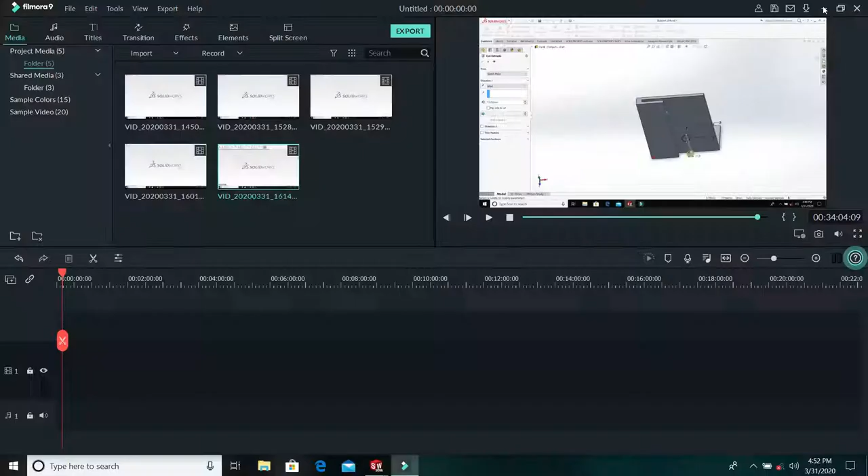Welcome back. So what we'll be doing now is assembling the whole unit, the whole burner unit. We're assembling the knob, the shaft, the support, the rack, the pinion, and the slot with the carriage mechanisms.

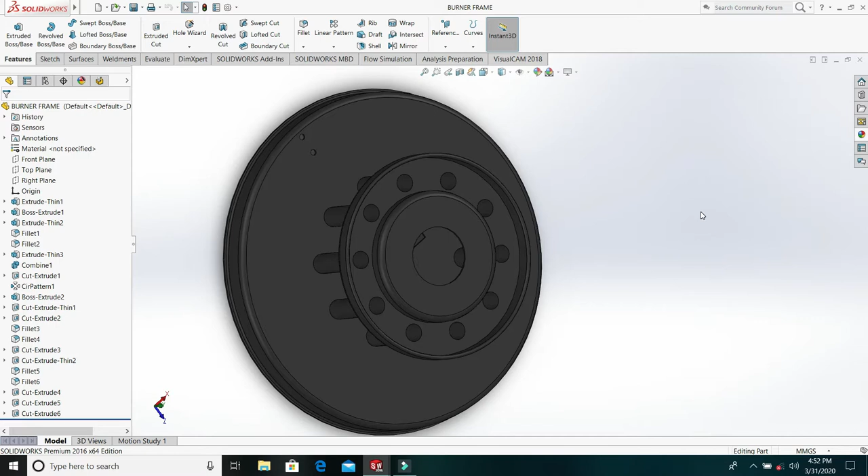So go to your Solidworks and open Ctrl New, and this time you click assembly. Say OK.

So the moment you get to assembly, one of the critical things you have to ask yourself is what's the first critical thing, which is the frame. The frame is the first thing you'll be adding in this particular assembly. So click on the frame and bring it to the screen. Now you can see the frame.

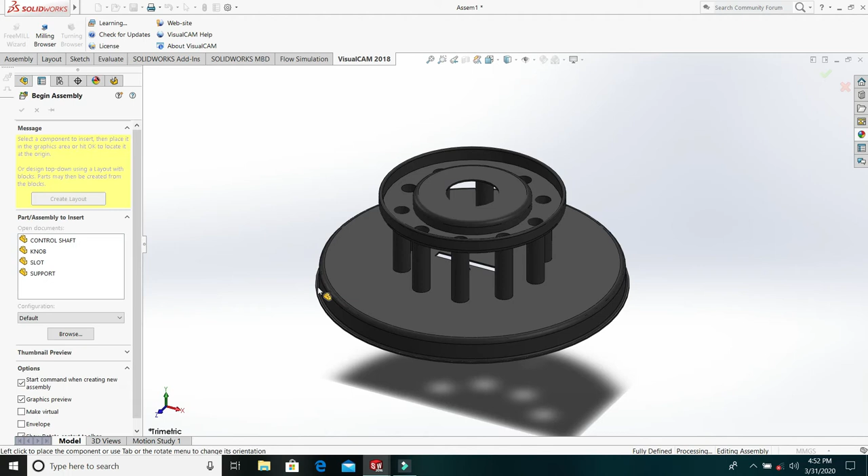Solidworks immediately aligns it to the center and locks it. But what you want to do is right click on it and say make it float.

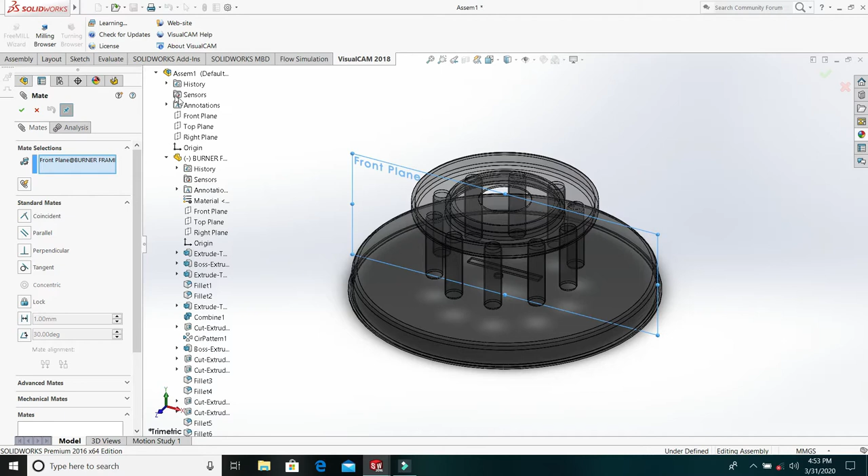So the moment you float it, the front plane of the burner should be mated to the front plane of the assembly. Then the top plane of the burner should be mated to the top plane of the assembly. Once done, the right plane of the burner should be mated to the right plane of the assembly.

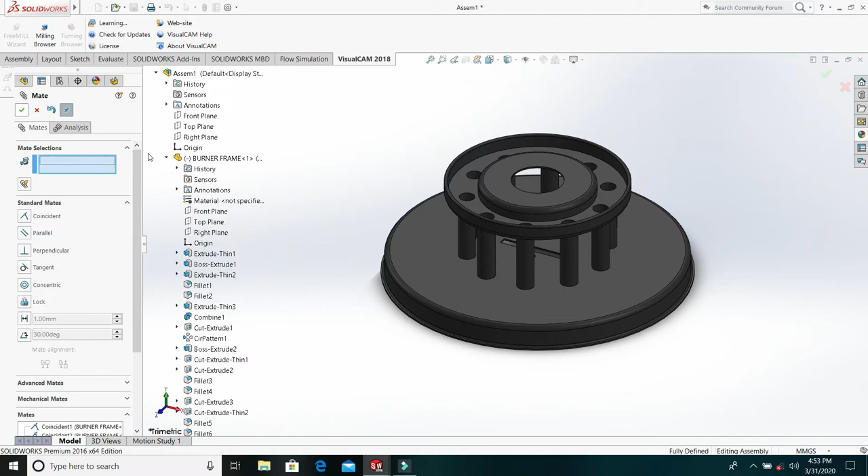If you are done with these three fundamental mates, come back and right click to say make fixed. That stands as your reference point of the first component, and it's fixed there.

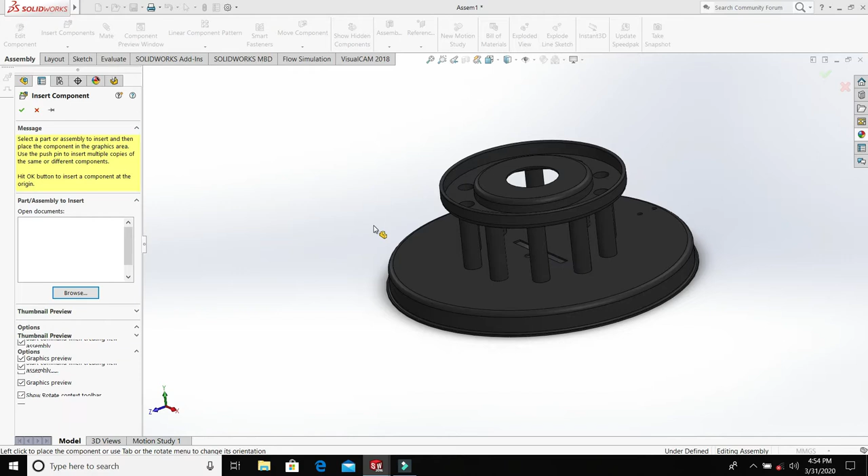So the next thing is to go to assembly and say insert component. What's the next component to put into this system now? For me, I'll put in my carriage assembly. So I'm browsing for the carriage mechanisms. That's the carriage mechanisms coming in.

So the first thing you want to do is create concentric mates between the two circular objects - that's the first edge and the second circular object.

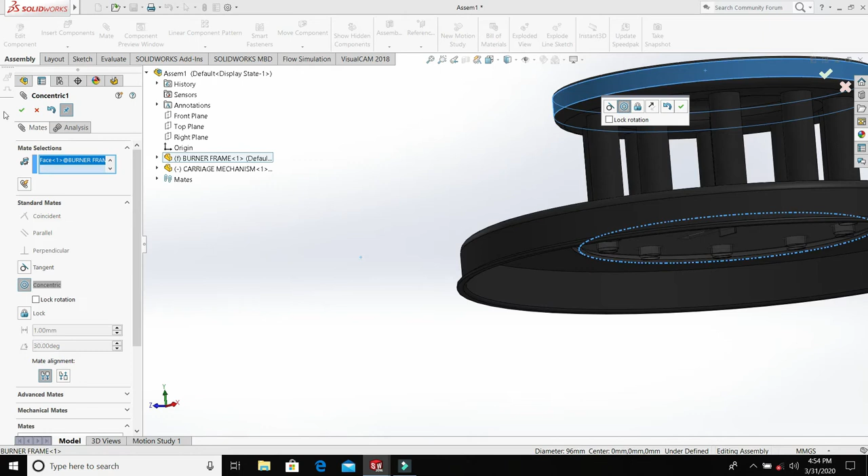Now, one critical thing you need to do here is make one of these holes concentric as well.

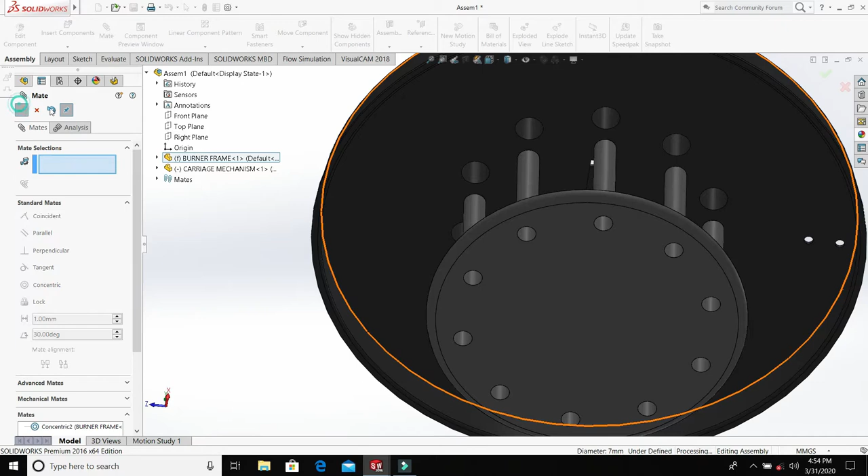If you look at this particular one, it has a limit between minimum and maximum. The distance between here and here has a minimum value and a maximum, and the maximum keeps going up.

To do this in Solidworks, you go to mate, then advanced mate. There's an advanced mate called linear coupler. Go to linear coupler, and within it go to limit.

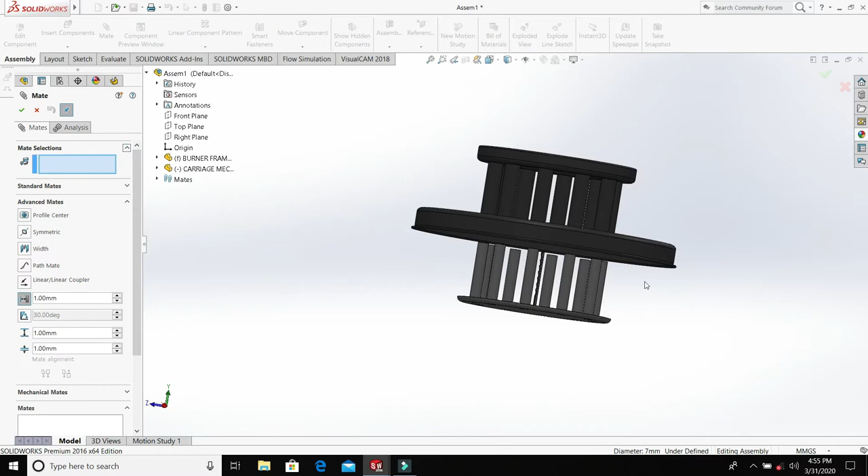At limit, you can define the maximum and minimum point between any two surfaces you select - that's between that surface and that surface. Now I want the maximum distance to be 30, and the minimum to be 2.

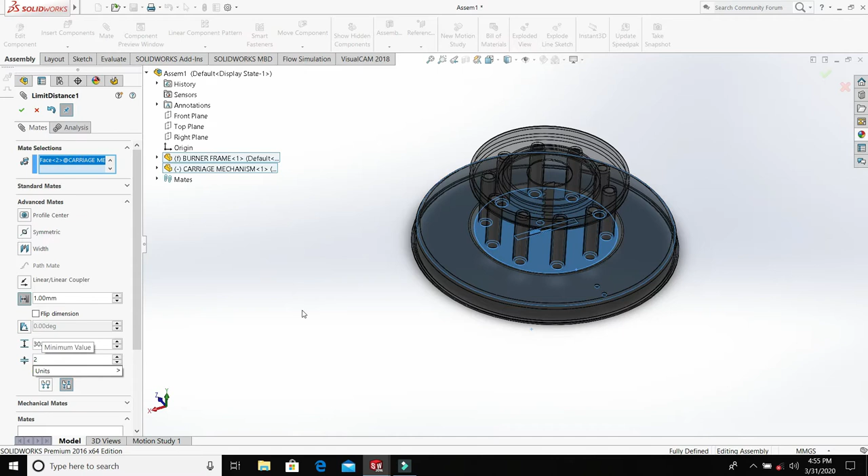So you can see from that screen, I can drag it up and down, the way it behaves in real life.

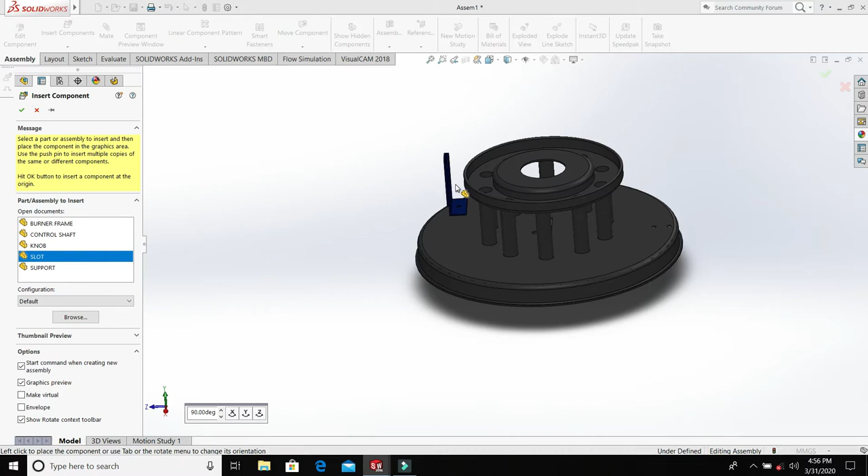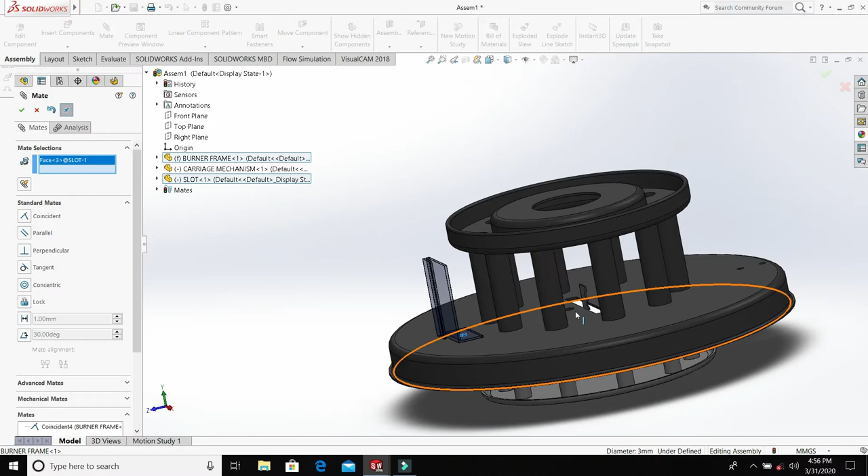Alright, the next thing to put in now, let me insert my slot. So the surface of the slot must be mated with this surface like that, and this hole where you add the bolt to hold it also must be concentric to this one. And turn it back.

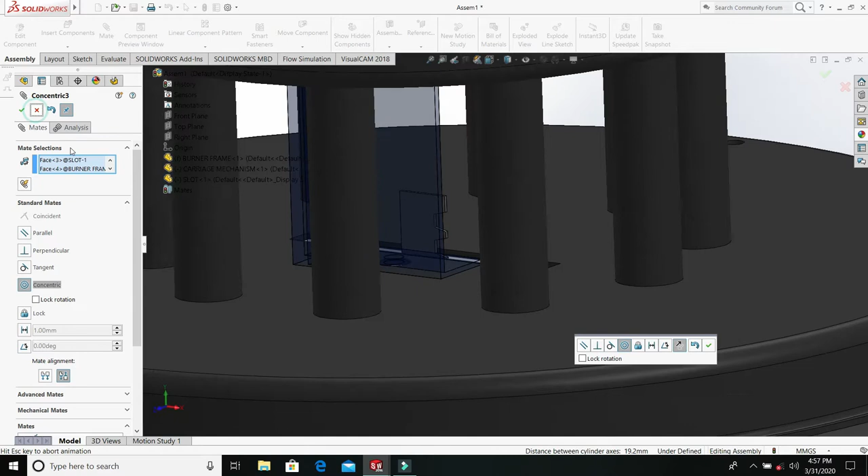Alright, so this face now - let's repeat the concentric mates again. This must be mated with this, concentric, yes. Then this surface must be mated with this surface, this one.

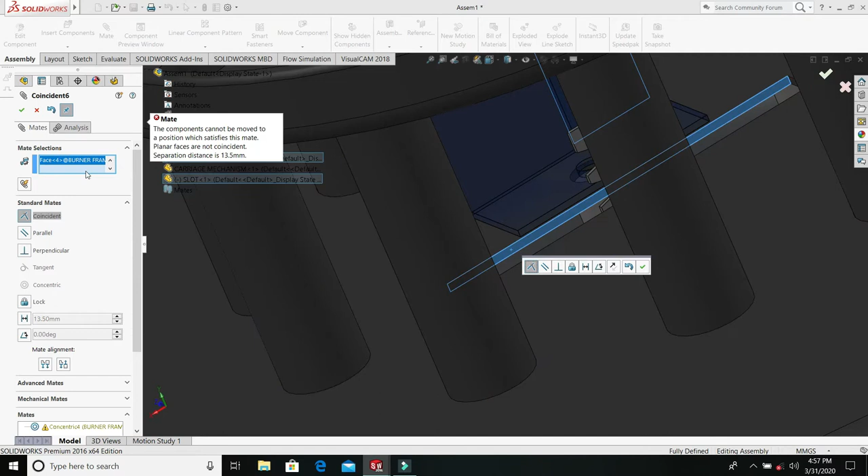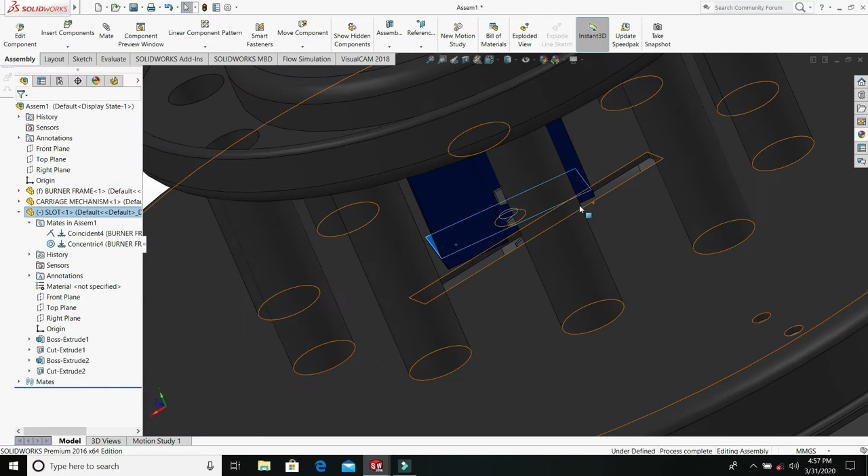So let's look at this guy, this slot - how many mates are in this slot now? This face must be mated with this face.

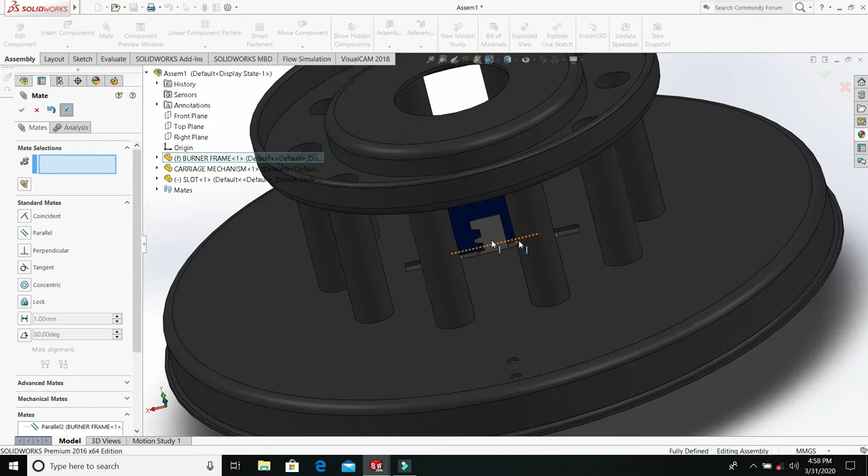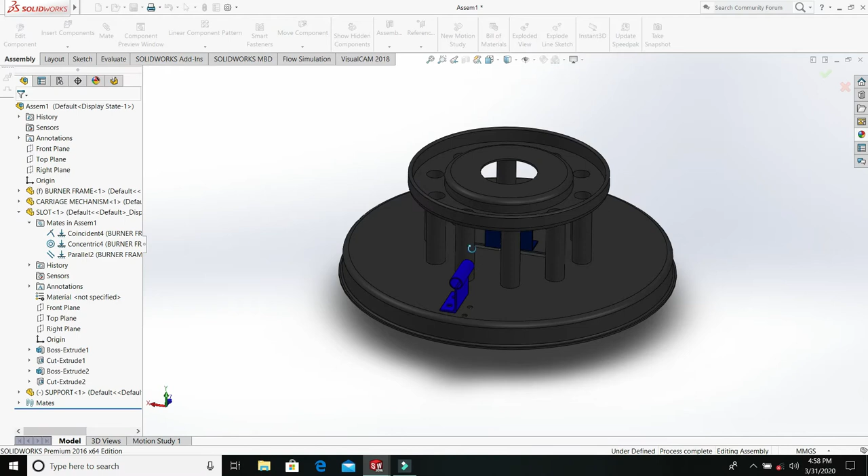Then I should bring the support, this particular support, to the same assembly. So this face of the support should rest on this face.

And this hole should be concentric with this hole. Likewise, the second one should do the same thing.

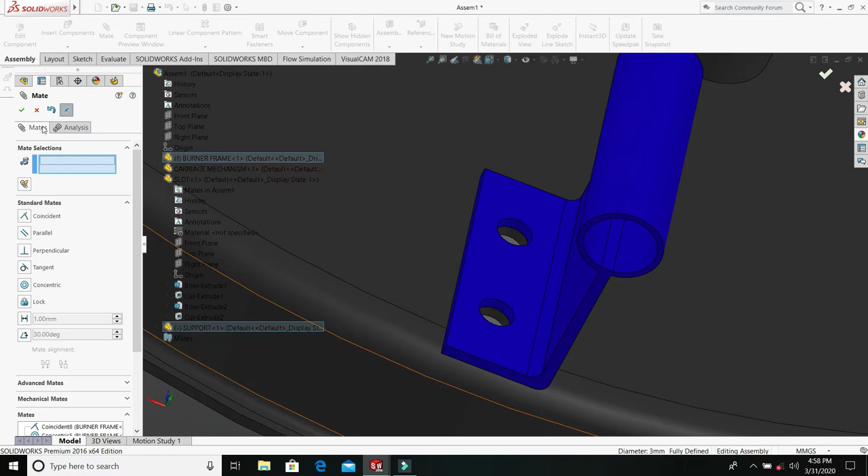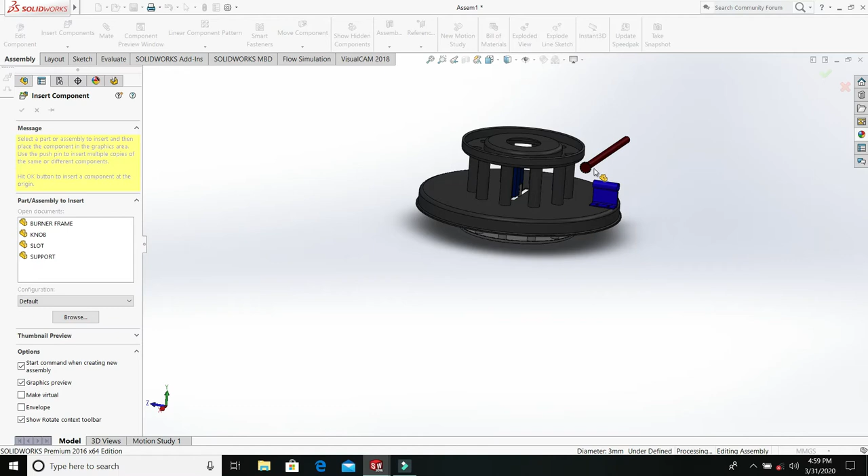Alright, the next thing for me to put in now is the shaft. I need to put in this shaft now. So insert component - control shaft. The control shaft passes through this circle, so there's a concentric mate between this and this. Concentric mate, but in the other direction, down.

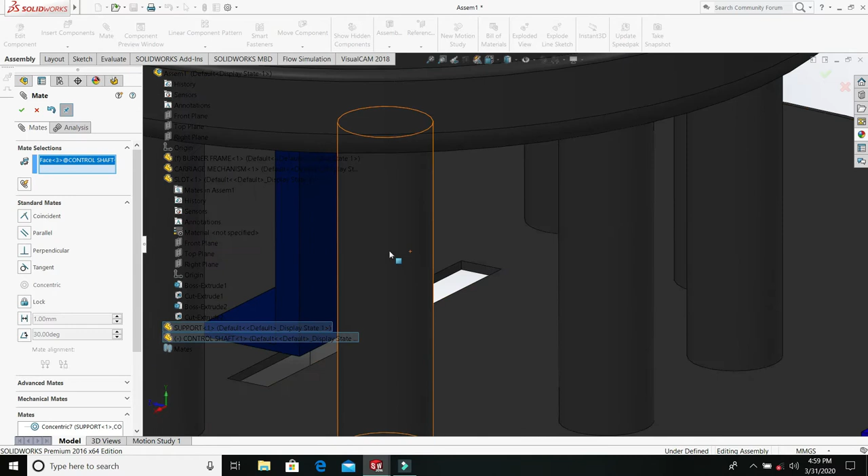So the head of this guy must be coincident with the head of this one, so that they can drive each other. Alright, then the next thing to bring in is the controller.

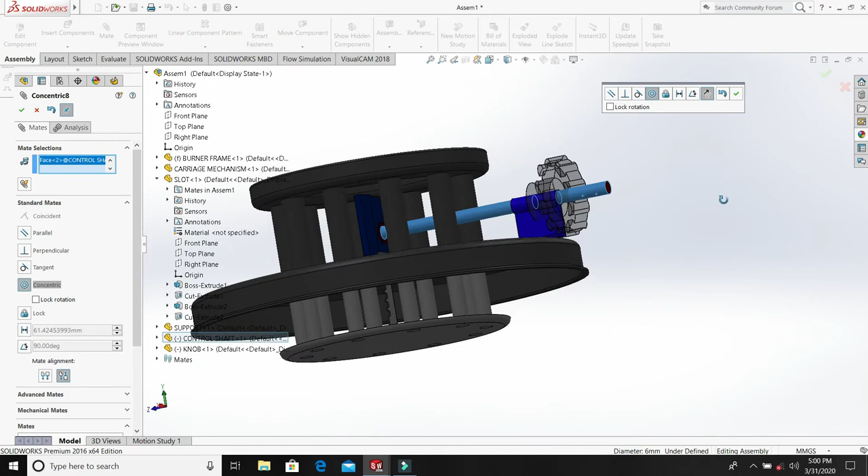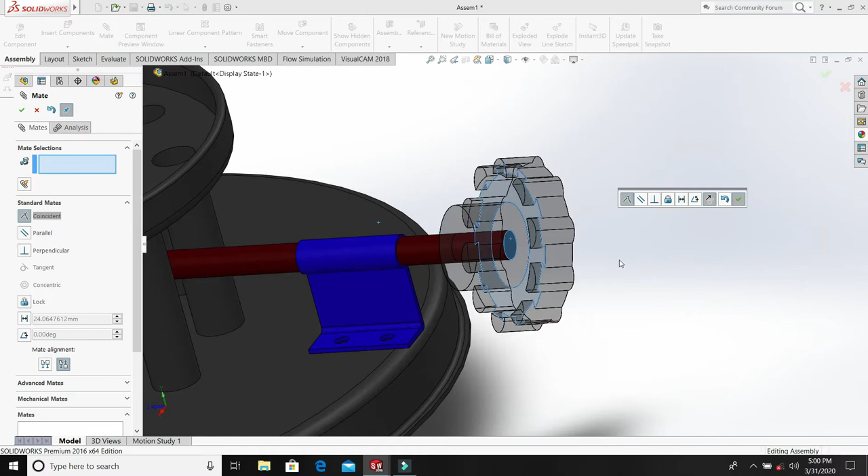In such a way that if I rotate this, you can see kind of movement between them. Observe, if I rotate this, it's coming down and coming up.

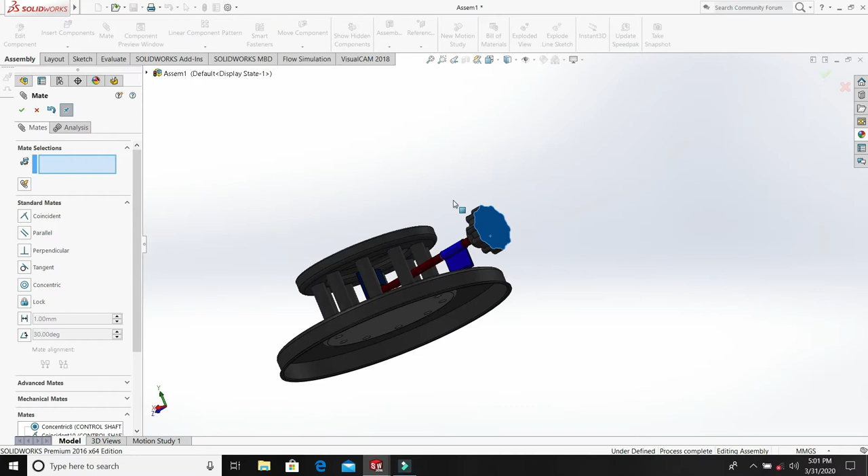So that's it, and that's about your burner unit. Let me quickly add bolts and nuts to this, and a set screw to hold them down in position. So that's it.

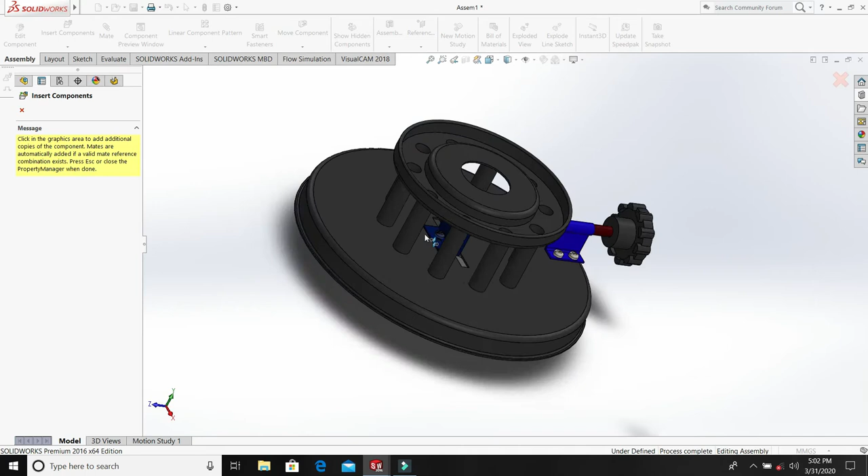So this forms your burner unit.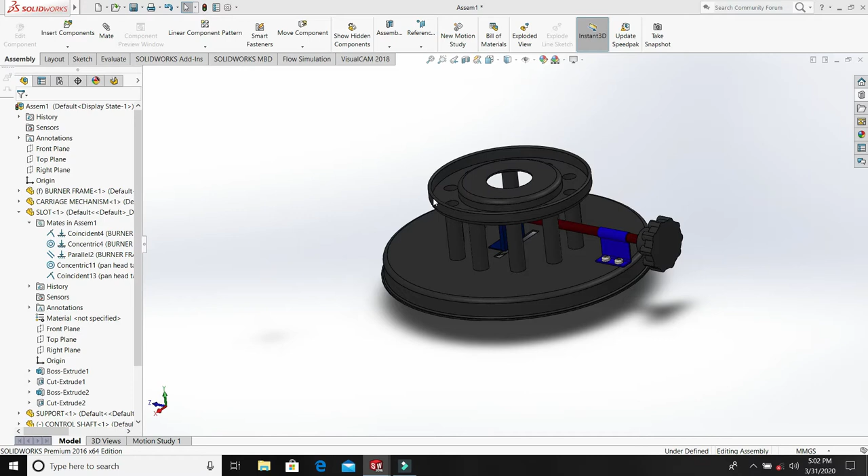So save everything else. Okay, show the camera. Bye.

Alright, so we've taken our time to design all the necessary parts. So what we'll be doing in this video is to assemble the whole stuff.

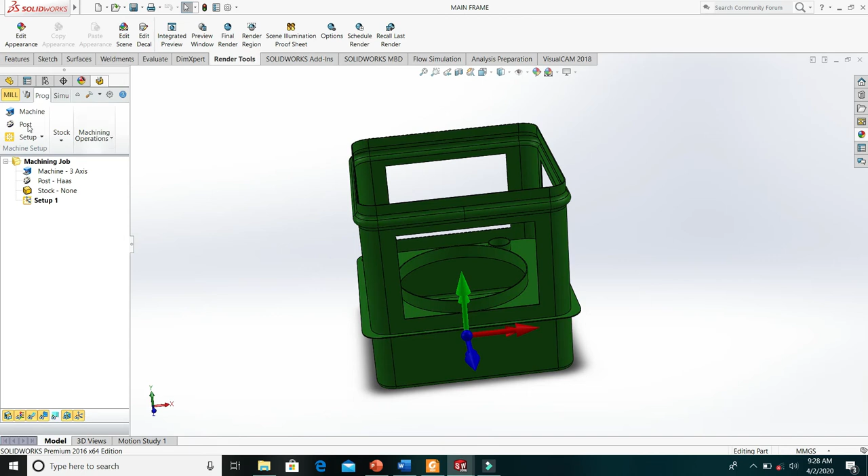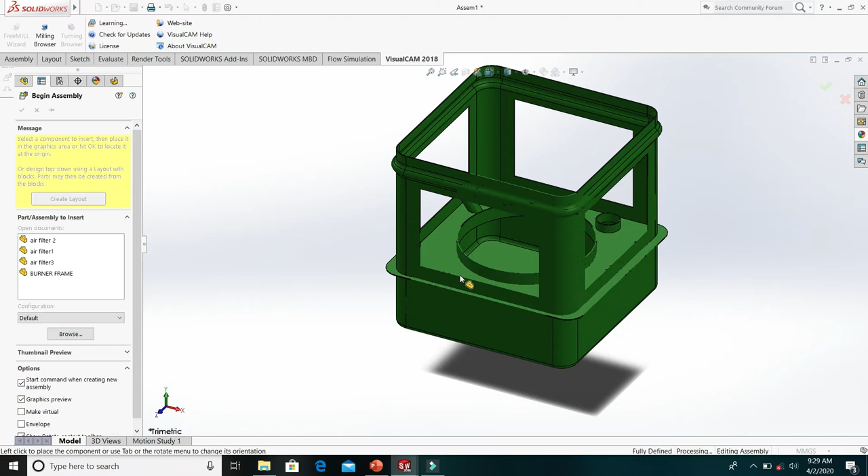I just want you to observe what happens as you drop the mainframe. You observe that Solidworks automatically moves the frame into an already existing location, but that is not your location. The reason why you need to do this is that we are trying to generate the 2D drawings.

This location is not actually synchronized with the front view of the assembly. The assembly environment has the front plane, the top plane, and the right plane. Likewise, the component you just placed in has its own.

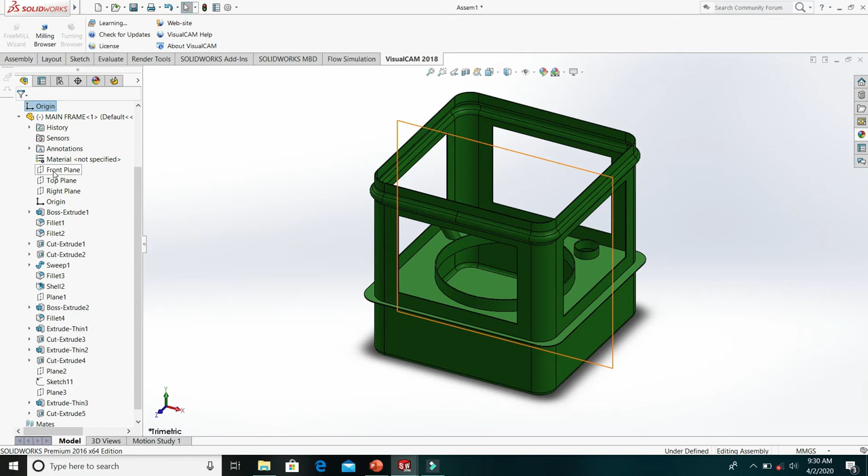So your first task is to align the assembly front plane with the component's front plane, majorly which is the mainframe. We bring the mainframe because it's the stable, stationary part of the machine.

So you say front plane, mate. You come here to the design tree, you drop it down, mate it to the front plane. So automatic coincident relation is added to it. You can see it, then you mark it.

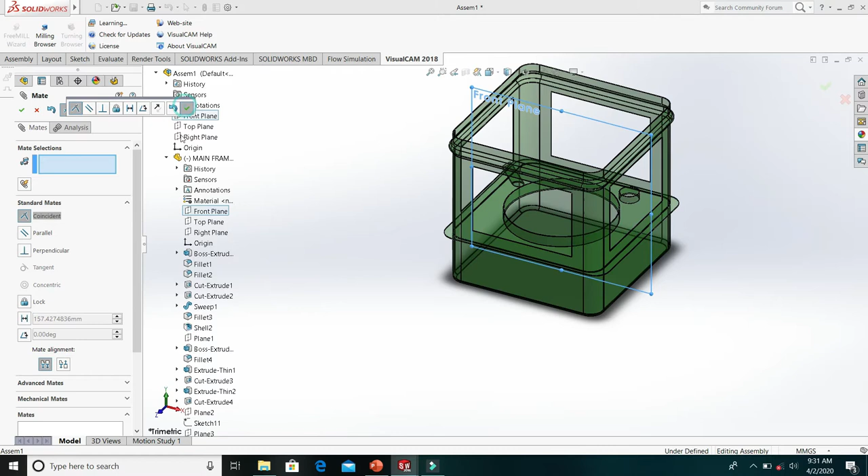Then you go to the top plane, then you move to the top plane of your product, then you mark it. Then you go to the right plane, then you go to the right plane of the product, then you mark it. These first three mates are the very fundamental mates you have to make anytime you're doing an assembly.

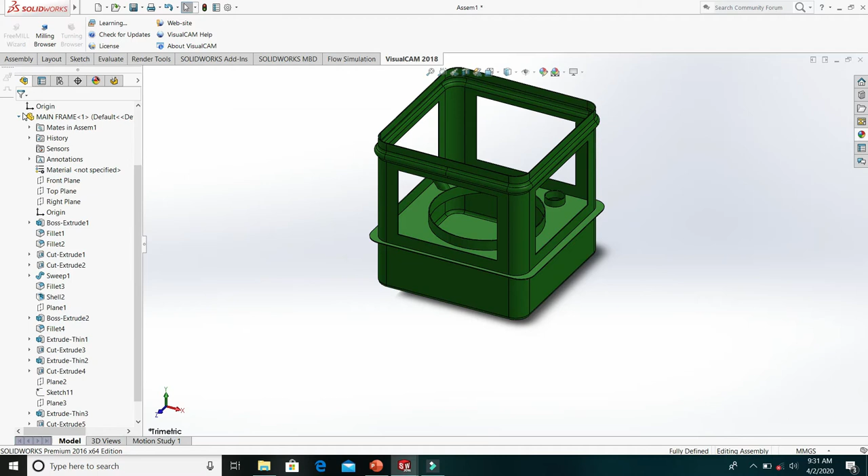Then you right click on the component again and you put fixed. So the component is fixed at that location, so it cannot be moved. You see, the component cannot be moved. You can rotate it and see different dimensions.

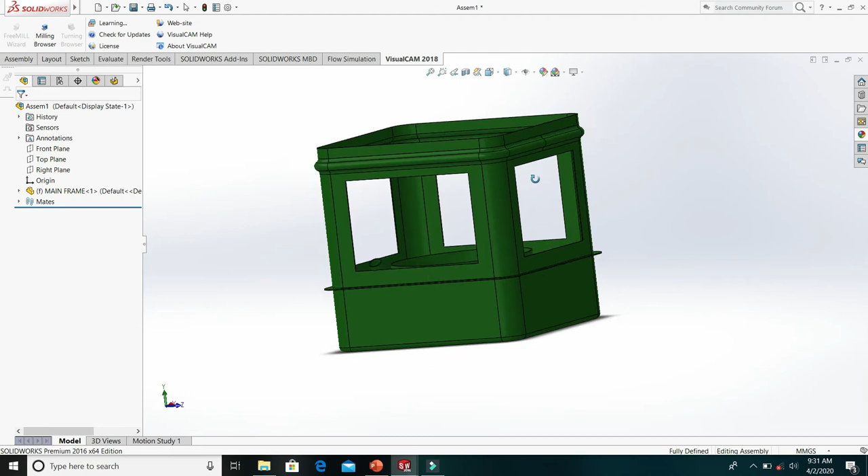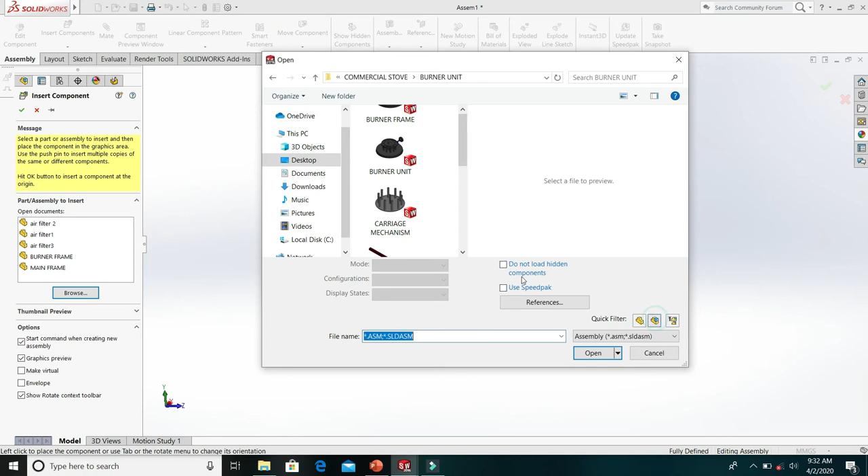So from here now, the next thing to add is to bring in the mainframe of the body. You go to assembly and say insert component, then you move to this place. The burner unit, the whole burner unit, has been assembled before as a pre-assembly, so we will be bringing in the assembly of the whole burner unit.

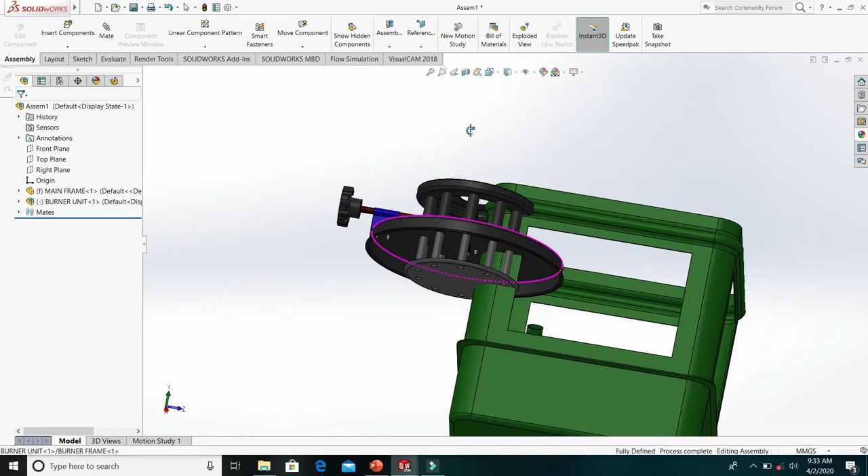So the desire is that this particular hole will set with this hole, and this particular surface will flush with the top surface of this plate.

So let's start. I click on this place and I say mate. Mate with where? Mate with this place. Alright, so you check that's the right way you want it to be done. This hole, this circle, must be concentric to this circle.

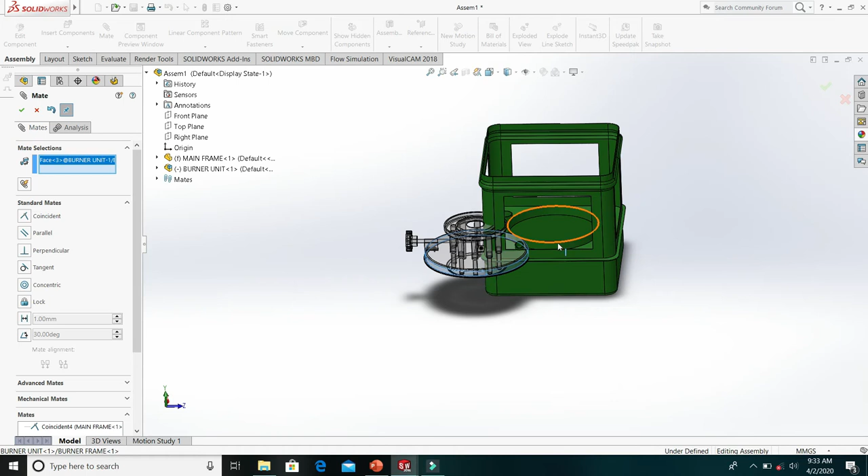So you have this. Now, one critical thing you need to observe is that this particular sub-assembly can still be rotated, so you want to position it in one particular place. So I will go to the sub-assembly I just added.

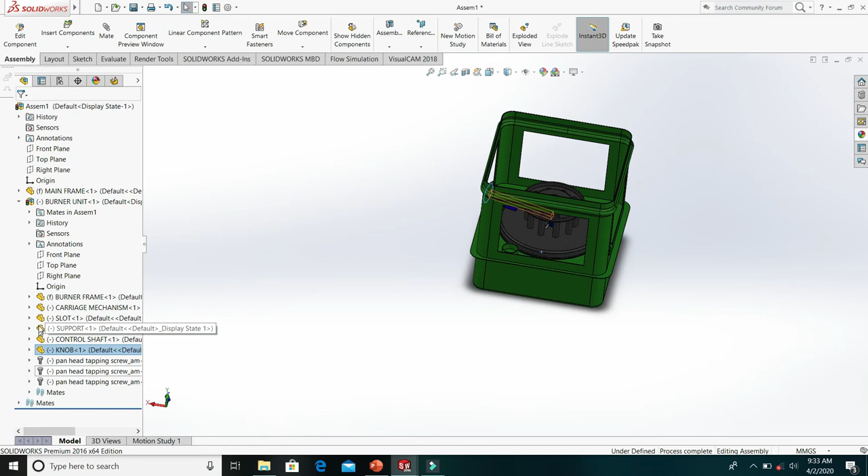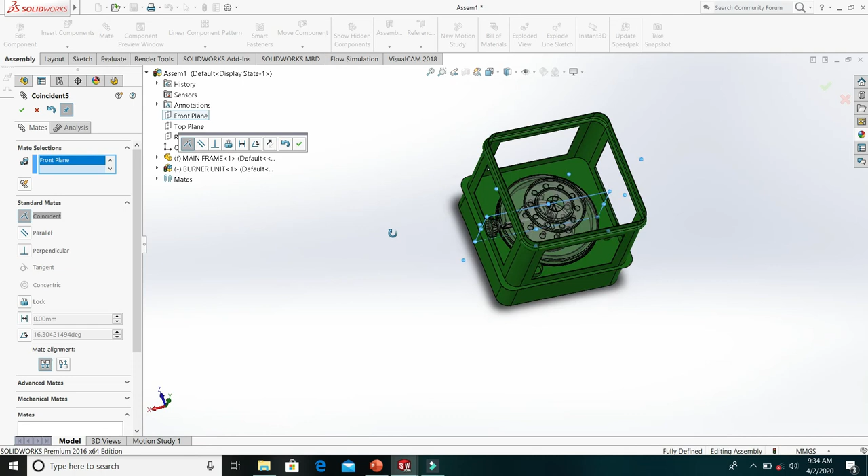I want to locate all its relevant mates. So I'll make this right mate, the front plane of the assembly, and we have it there. So it means all the air filters were added.

I'll be putting in the air filter 1 first, which is the most inner one.

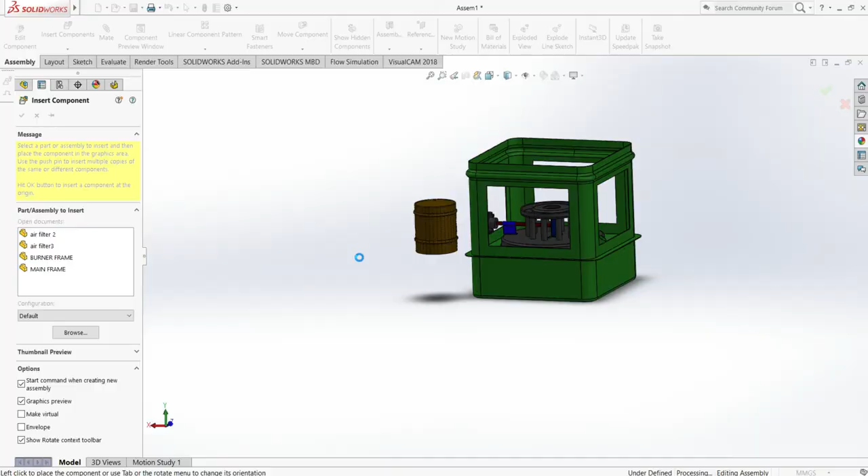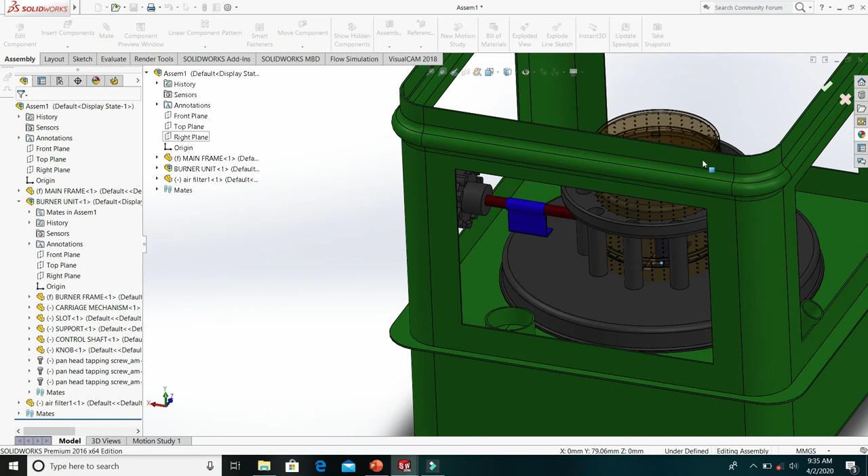There should be a concentric mate between this surface and this surface. Likewise, this pillar should be sitting directly on top of that surface. What we'll be doing is drag it up this way, and put it where it's supposed to sit. That's the place of the plate.

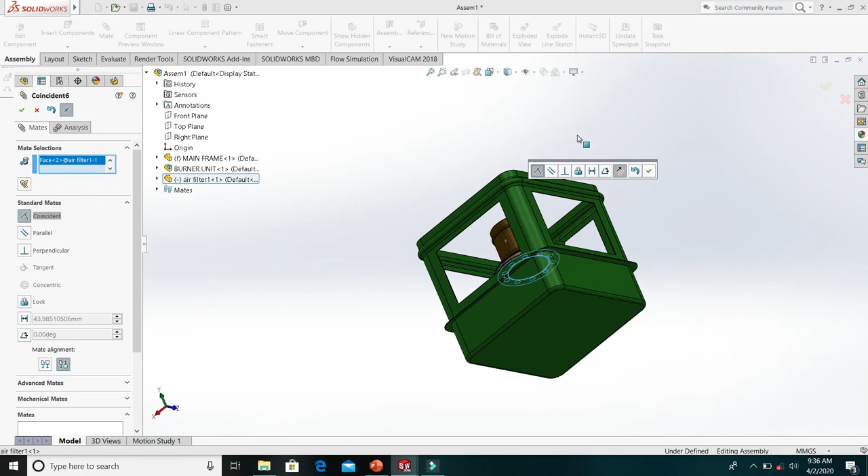Then you turn the whole thing out again to locate the second surface in question, and an automatic coincident relation is added. Then you add the second technique, concentric relations.

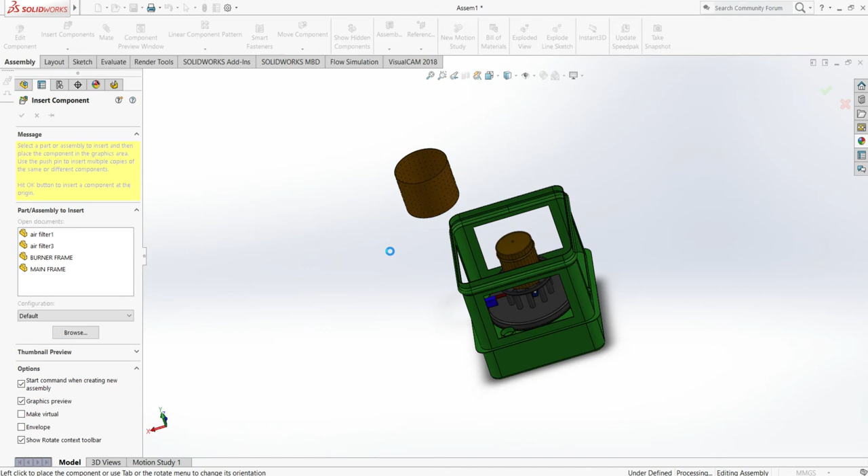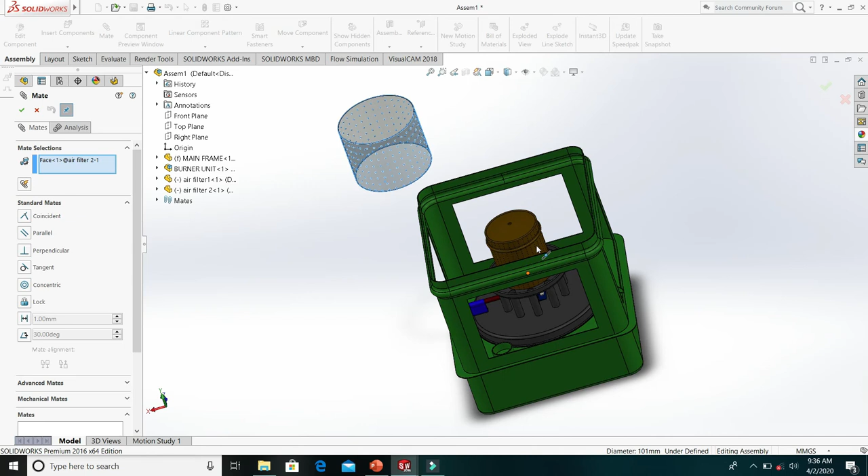Click on the surface. So you click on this surface, you click on this surface, and you click on the other circular surface. Then an automatic concentric relation is added.

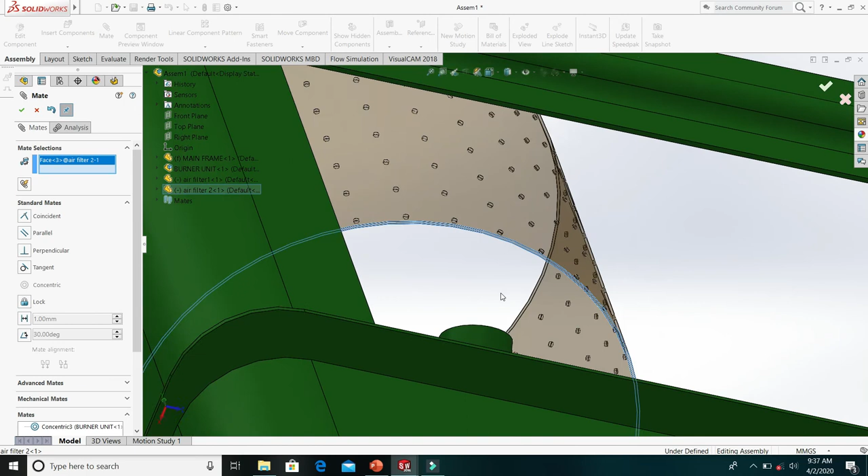You click this particular surface because your aim is that this air filter should sit directly here. Then another concentric relation is added.

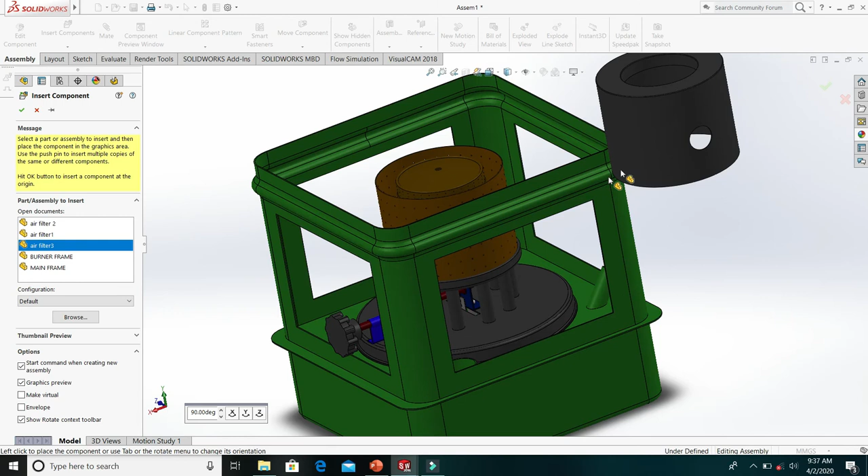So the last thing you have to add here is the third air filter. You add the third air filter, then add concentric relations to it, mate with this, and add the concentric relations to it.

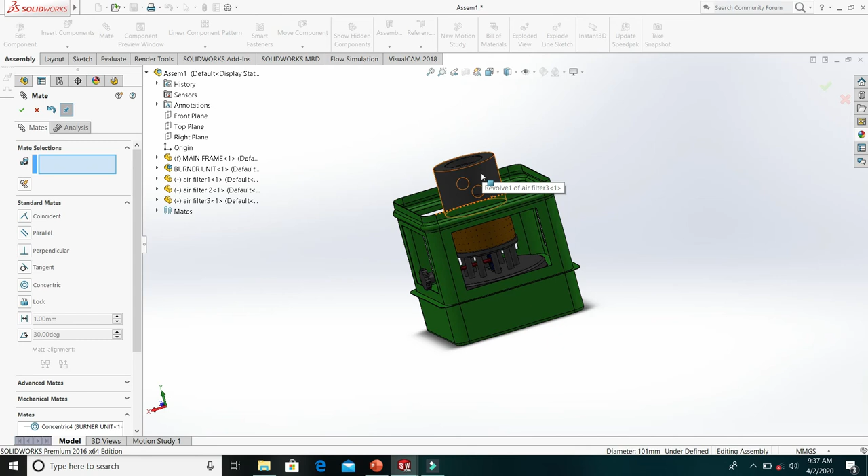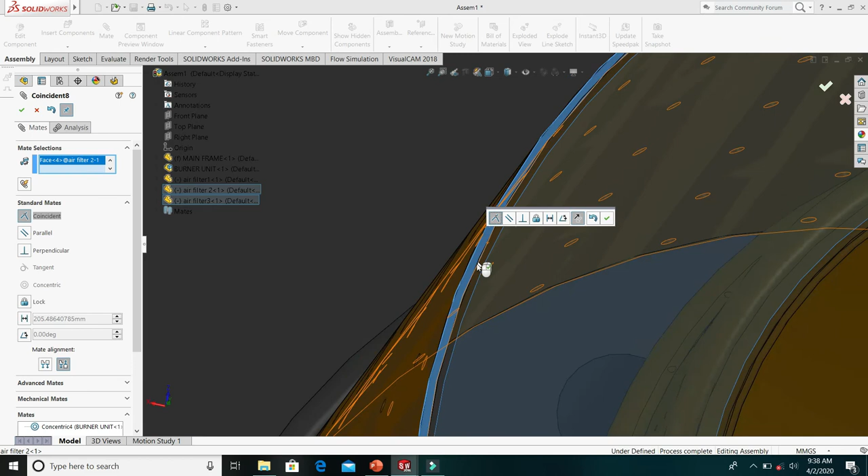From experience, we discovered that this was not well positioned. So I'll be showing you something, how to edit a component in assembly. Click on it and it says edit part. Okay, I have to save the assembly.

Let's name it kerosene, kerosene stove.

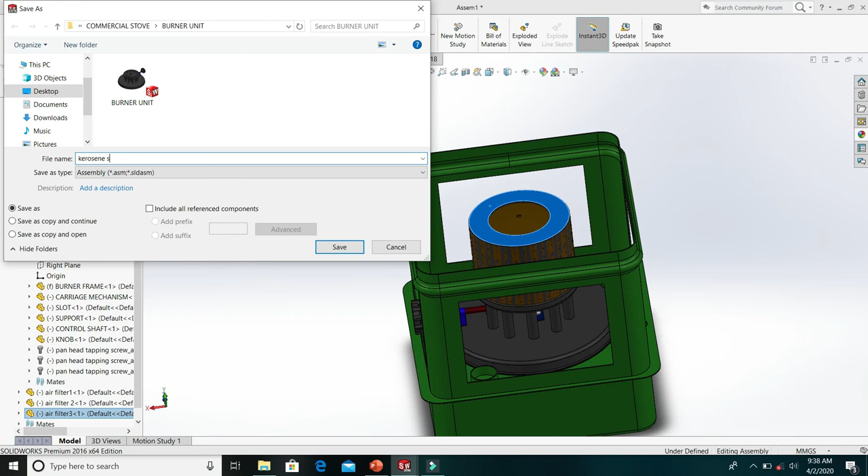The revolve that was used to generate this particular component, I use revolve in generation. So you go to your design tree, you will see the component in question in blue color, then you can open it and do any editing work you want to do.

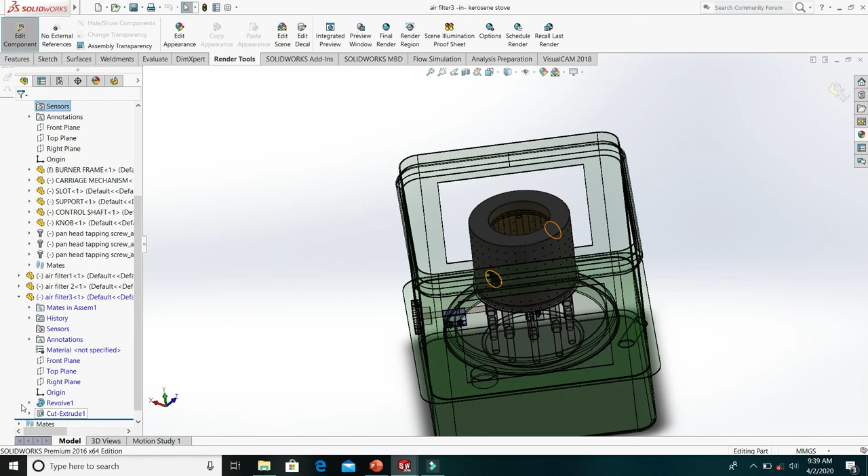So is this particular thing you want to adjust? I'll make this like 130. Then I'll make this one inside, the second one inside. And then I'll choose the next one.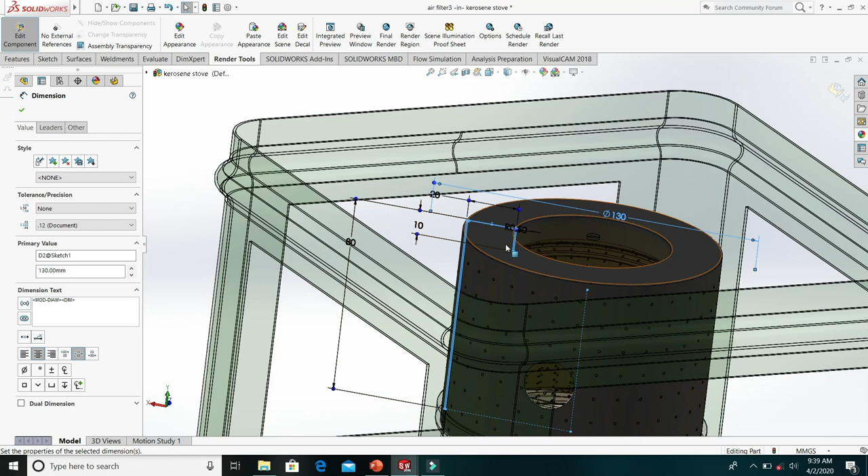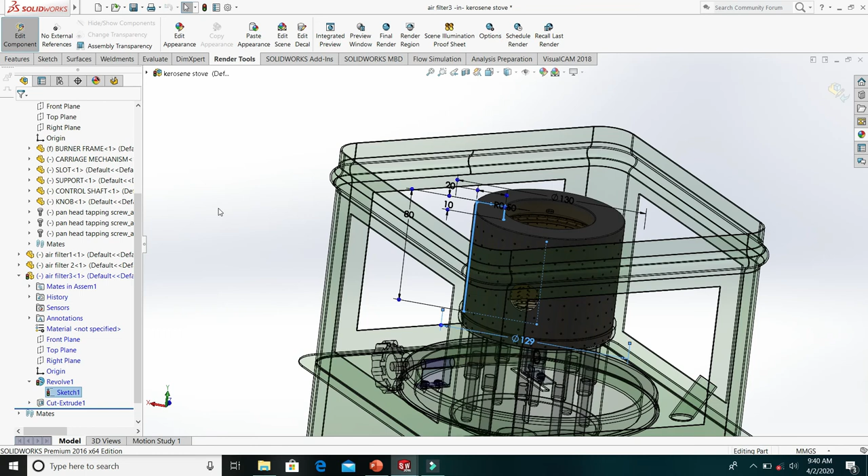Update. So you can see the way it behaves even before your assembly, before you return back. That's the way it should be in real life.

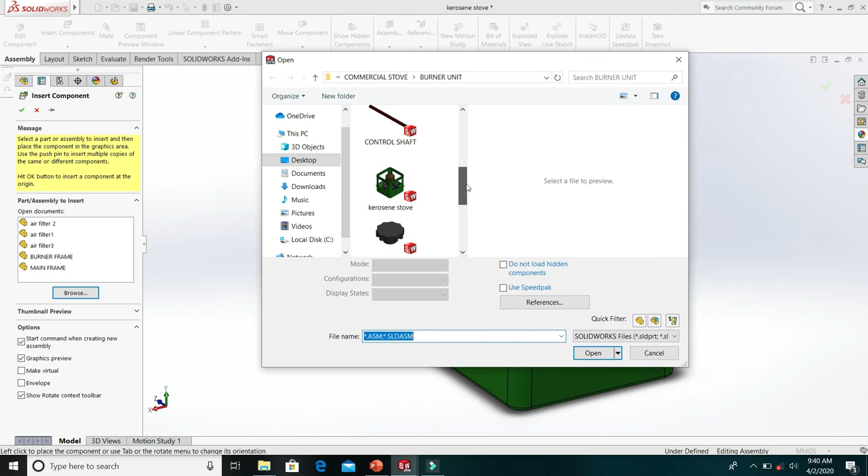Alright, so the next thing to add now is the cover of the stove and the stove skirt, the pot skirt, where the pot rests. So I'm adding the cover and the pot skirt, 1 and 2.

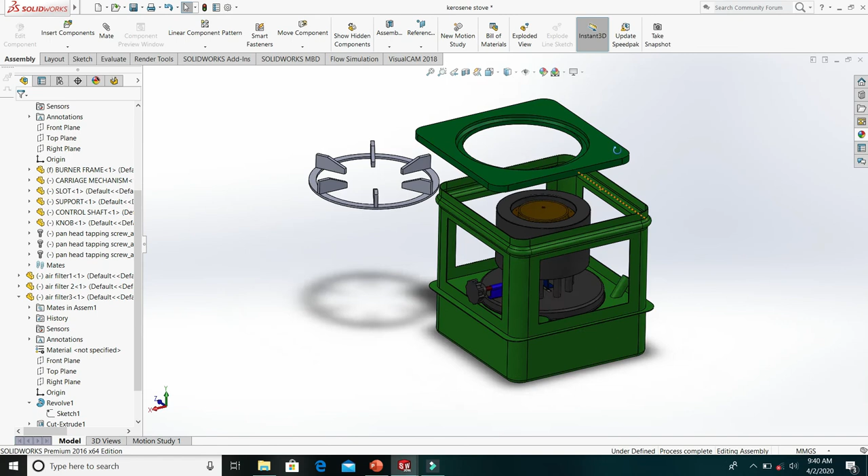Alright, so it is designed in such a way that this particular surface will meet this particular surface. An automatic coincident relation will be added.

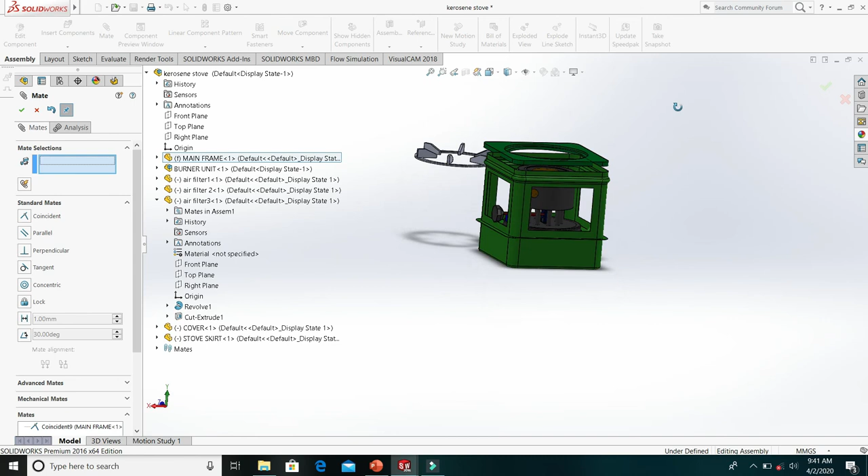Now, the desire is that this particular surface will be positioned appropriately. I will not be using advanced mates for this job, let me just use a normal method. Make this particular surface to this surface to this place and this surface to this place.

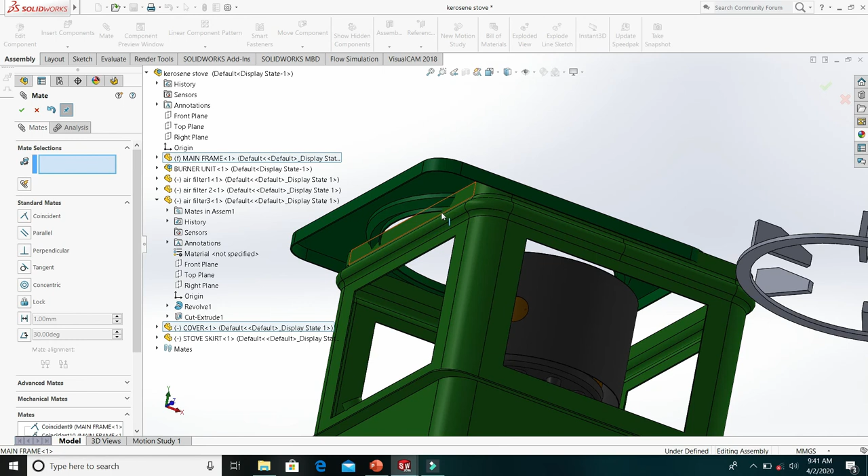Similarly, we make this surface to this surface.

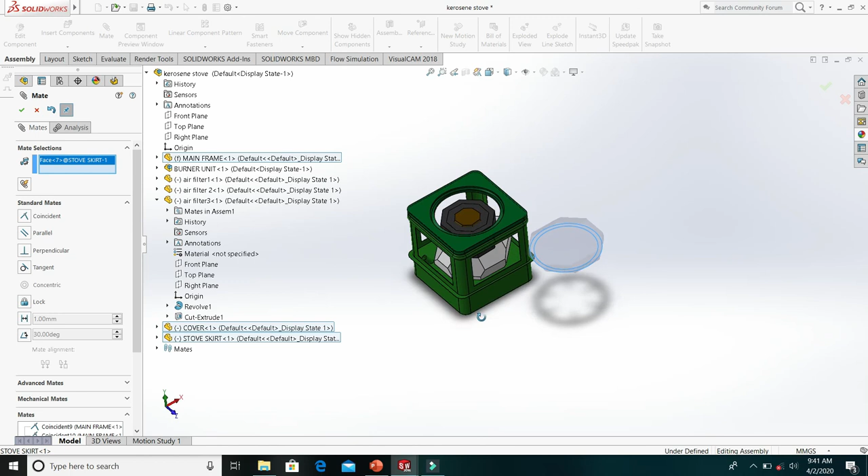That's that one. Then the next thing you have to do is make this surface to this particular edge. Concentric relations and coincident relations added.

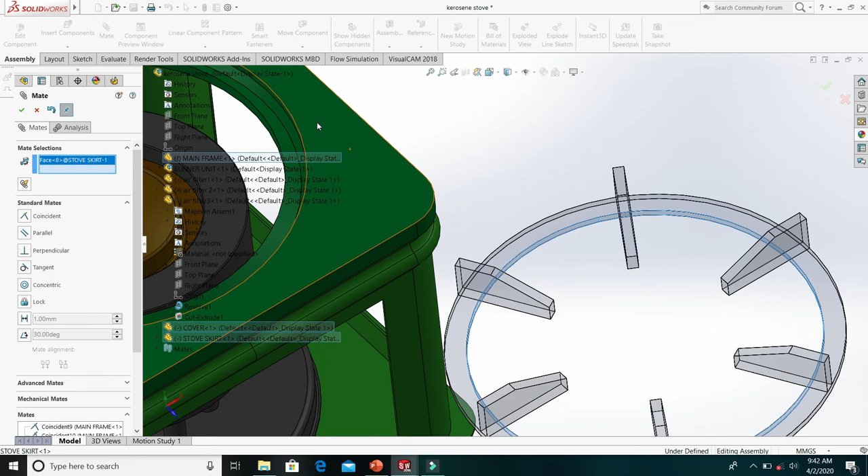Then make sure that this circle is concentric to this edge. And if you have done that, you have finished the assembly of the whole stuff.

This is how it looks like. I think it's awesome.

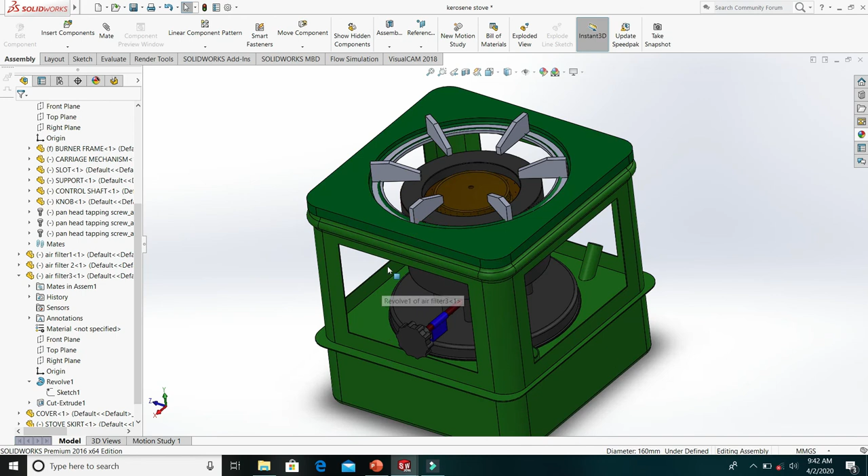In the next video, we'll be showing you how to run wonderful animations, how to do some critical checks on SolidWorks on any of your products for interference or other things to check on any product design on SolidWorks. Stay tuned.